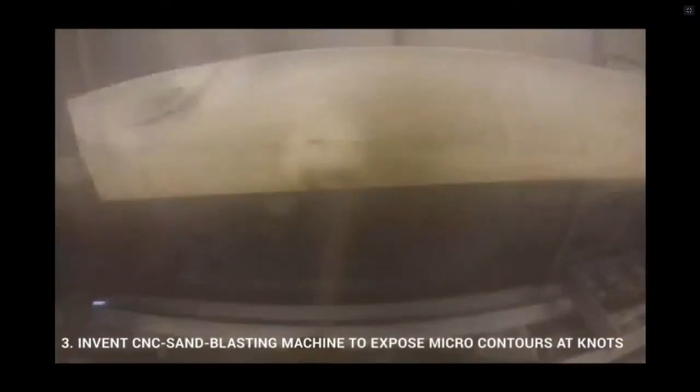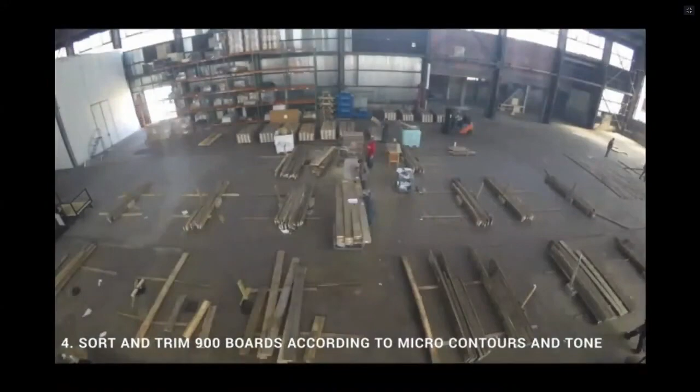So along these lines, I'd like to describe our design ecosystem at The Living, my design firm, which includes a variety of interconnected forces and involves a kind of hybrid of the familiar and the new, the ancient and the cutting edge, the technical and the social, the tangible and the atmospheric, the practical and the critical. So it's within this design ecosystem that I'd like to talk about a couple of examples of biodesign and our thinking about how biology can play into a broader design ecosystem.

So we think of our design ecosystem as a kind of network of interconnected loops. And within this network, the topic of our work often addresses climate change, and our approach, as Dan mentioned, often involves new possibilities at what we think of as the intersection of biology, computation, and design.

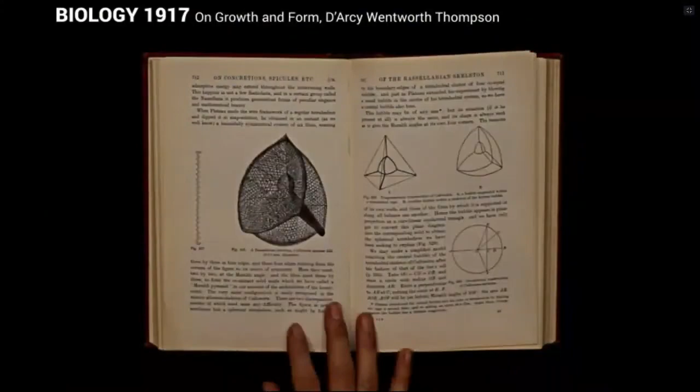Of course, as you know, you're the group that would know this best, architects and designers have been inspired by biology for hundreds of years. But I believe, as you probably also know and believe, that biology of today is different.

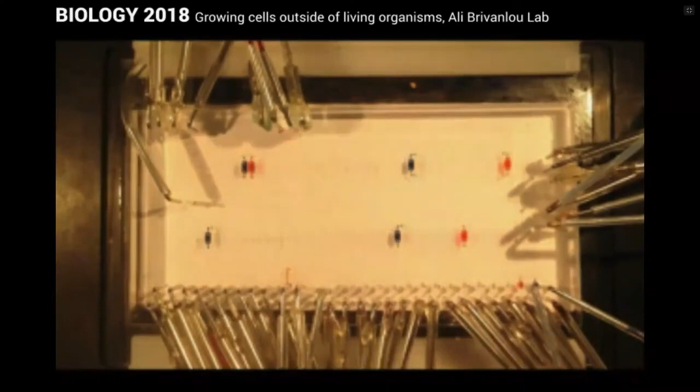It's now possible to grow a cell alone on a glass slide instead of inside a living organism. It's now possible to visualize neurons firing inside of an animal in real time. It's even possible to cut and paste DNA and bring creatures to life that never existed before, such as yeast that produces an anti-malaria medicine.

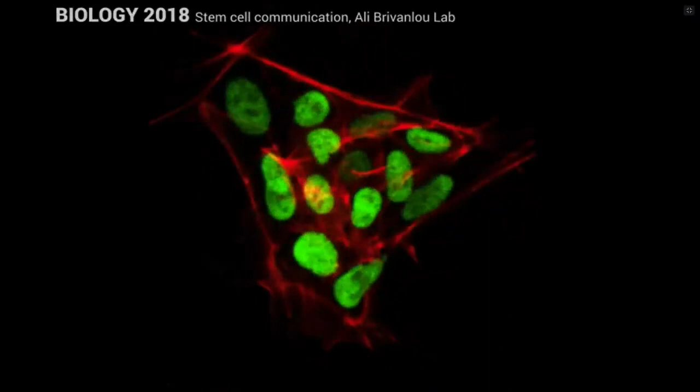And as of just a few years ago, with the demonstration of CRISPR and gene drives, it's now possible to redesign or even eliminate an entire species very quickly, essentially molding evolution itself.

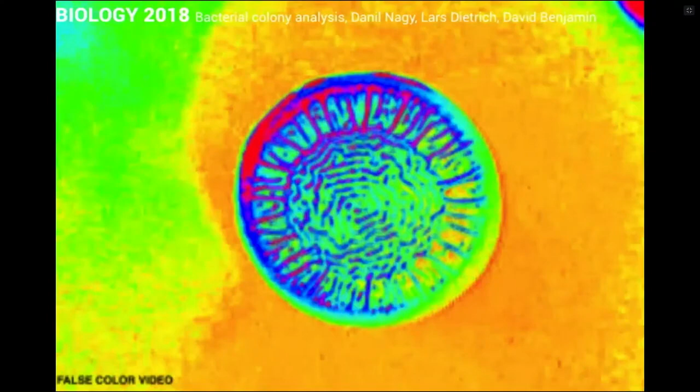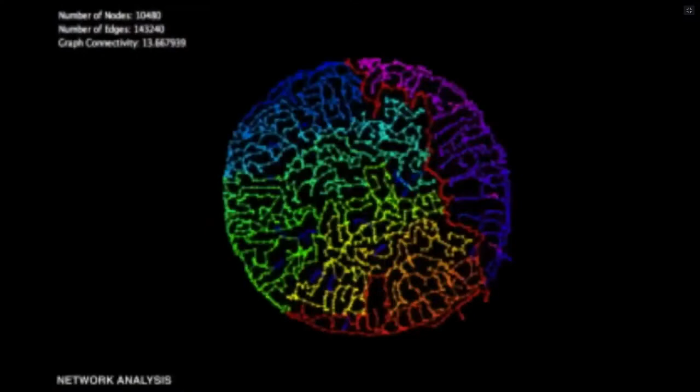In addition, it's now possible to apply some of the latest techniques of computation, such as computer vision and machine learning, to processes of biological growth. Biological functions involve hundreds of dimensions, but if they can be simulated in a computer model, then they can become a more actionable part of the design process.

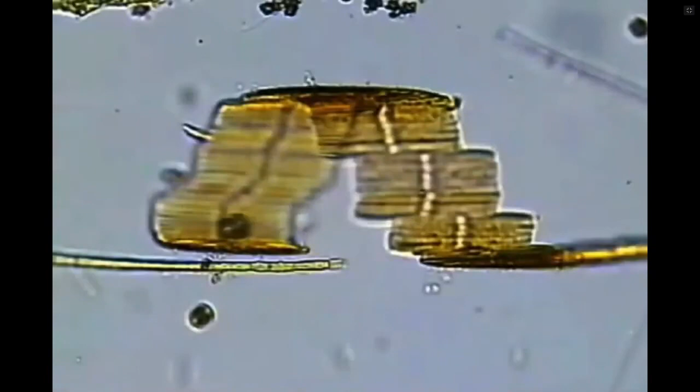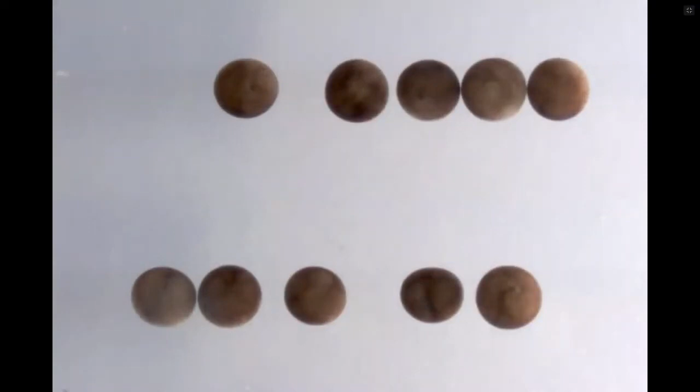Yet, the more you learn about biology, at least for me, the more you see how complex biology is and how much we still have to learn about it. And in this sense, I believe that design with biology may involve design with a black box, design with forces beyond our complete control, and design with uncertainty.

This new version of biology calls for a new method of design, a new approach. In the past few years, we've developed three specific ways of thinking about this, three specific approaches to biodesign, and three categories for projects. I'd like to describe them briefly here.

The first one is biocomputing, which I define as using actual living organisms to process information and solve problems such as perhaps reducing carbon emissions.

Although this component looks a little boring and forgettable—you've probably seen it several times on a plane and not thought much of it—it's actually very difficult to design with traditional engineering approaches, especially if you want a lightweight component. Airbus, in reimagining the future of flight, was thinking about how it could reduce the weight of airplanes, which would reduce fuel consumption and therefore carbon emissions.

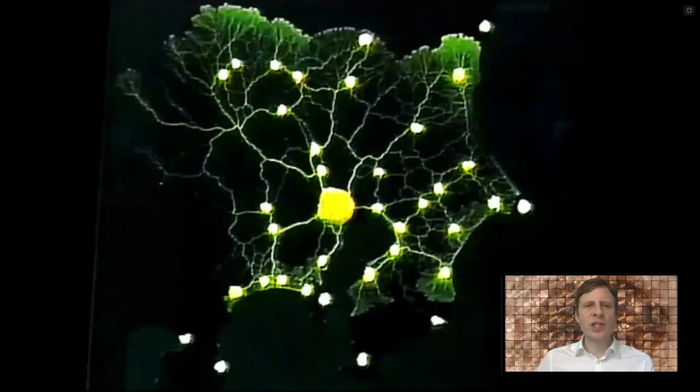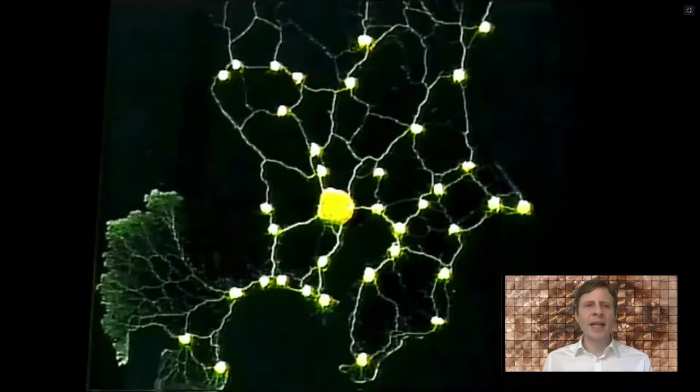This is where we turned to a living organism, in this case Physarum, also known as slime mold. Physarum grows in complex networks that are efficient and redundant. They're efficient in that they use a small amount of material to connect the dots—in this case, sources of food for the Physarum. And they're redundant in that the network can have one line removed or damaged, and the organism as a whole can still keep all the dots connected, more or less.

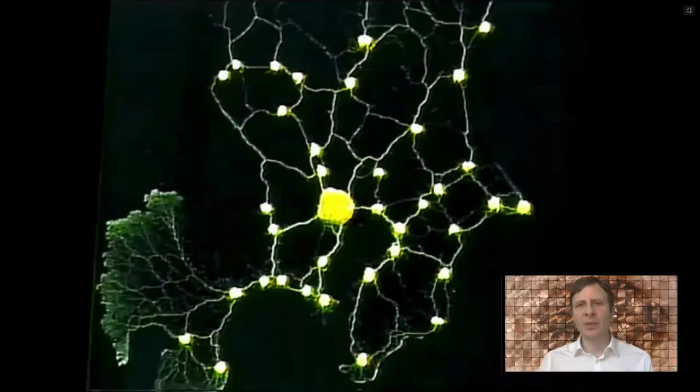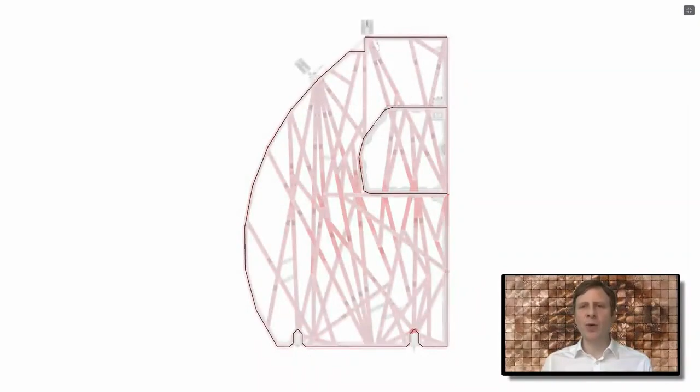So we used this logic, the logic of slime mold networks, to create an algorithm to generate potential partition designs, connecting the dots of what this partition has to do—connect to the points above and below, and hold some equipment. We used a process of artificial evolution to generate, evaluate, and evolve literally thousands of different design options, exploring a wide design space the way natural biological evolution itself does. But in this case, we're doing it in the computer.

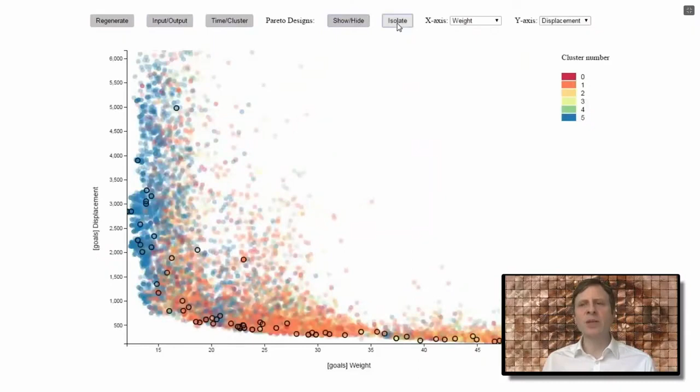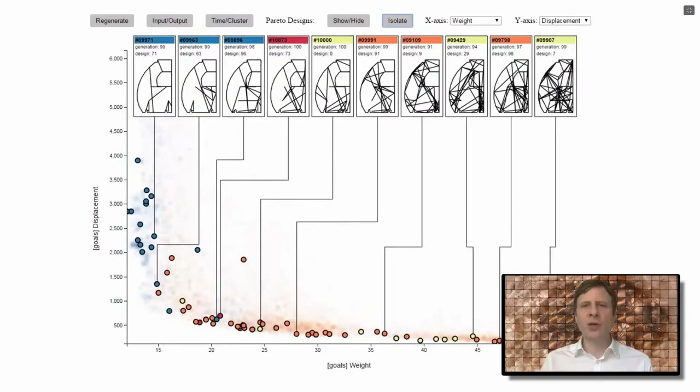So here's a different view of our data set. Each point on the graph is a different design option. We can sort the designs according to a kind of color coding, which might be the virtual DNA of the designs, different types of design solutions. We can use algorithms to identify the best set of designs, shown here in the black outline, and graph them according to our goals. In this case, we want the lowest possible weight, shown on the x-axis, and the lowest displacement under structural load, shown on the y-axis. We want to be at that zero-zero point of the graph. There are a number of different ways to do this, and a lot of them are slightly unusual, beyond a typical engineering approach.

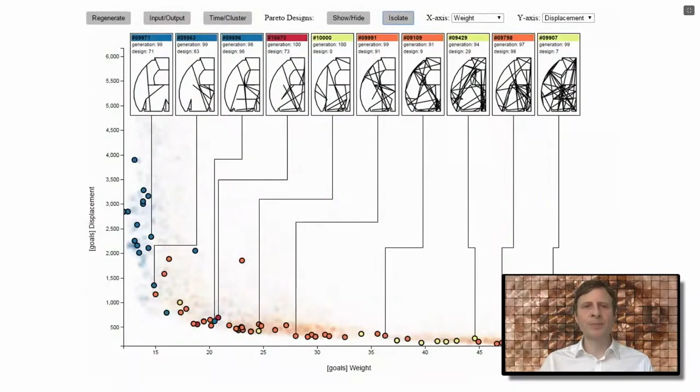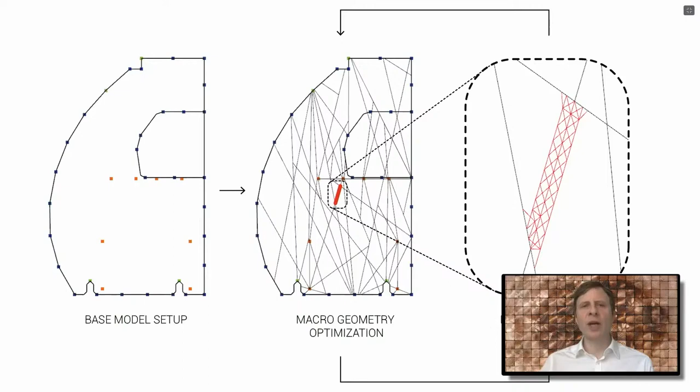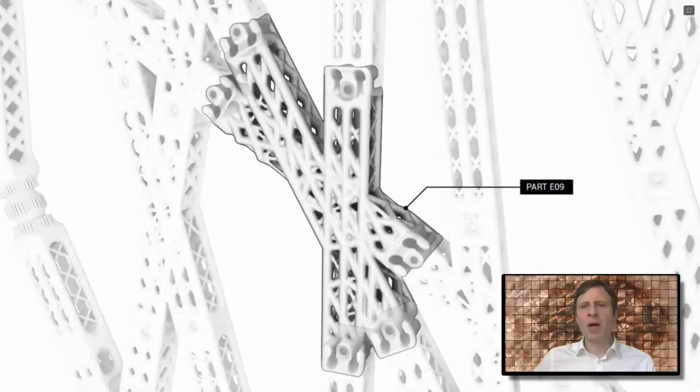Just like nature and biology itself, we can run this process at a different scale and rerun it. So here I'm showing how, on the left, we have the problem statement; in the center, we have a first round of artificial evolution, creating this crisscrossing pattern of bars. Then, in turn, we can create every single one of those bars out of hundreds of microlattice bars, shown on the right. To give you a different view, instead of using stock material as the bars, we're creating these bars out of microlattice, a smaller scale bar. Each bar is sized according to the amount of stress within it, somewhat like human bone.

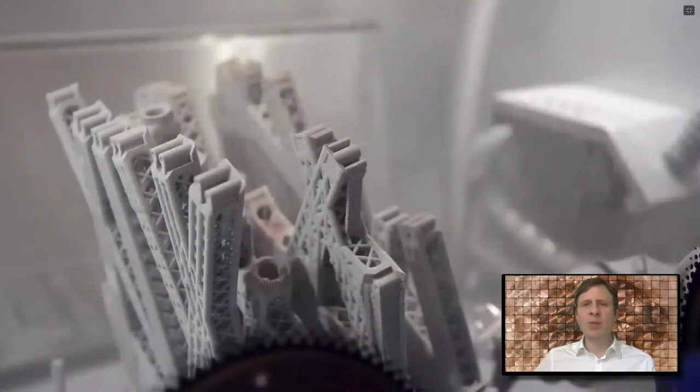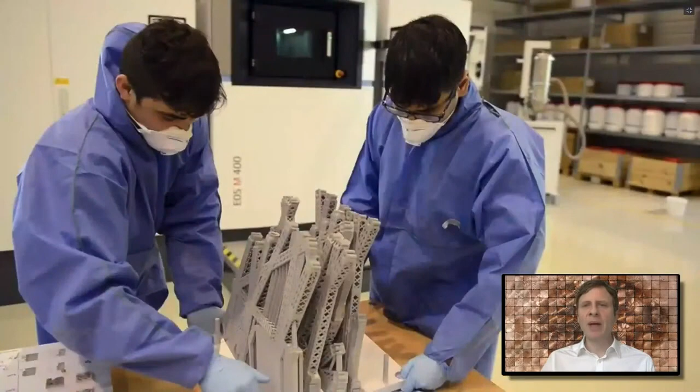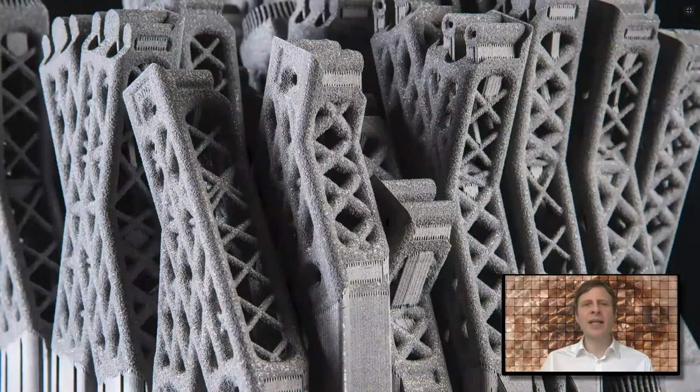And like many of our projects, we aim to test some limits of what was possible with the new design approach, but also to make it out in the world. So here you see the 3D printing process. We're making what is one of the world's largest metal 3D printed airplane components. We're doing this to see if this type of approach could create a new airplane component that could fly in today's planes. So here, zooming out, you see the first full-scale component created with this approach.

Here's a digital simulation of this component and how it's going to perform under something like the 16G test, or a static test where you're pulling on the component. And if that was the digital test in the simulation, here is the corresponding physical test.

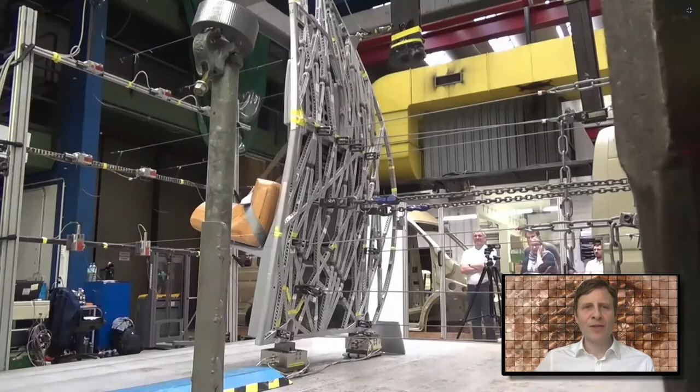This was just a few months ago, and if you look closely in the background, you can see some very excited but nervous Airbus engineers as we're testing the performance of this component, pulling on it with the weight of 16 times the force of gravity to see if this new approach, this new partition, can hold together. It did, and in the end, we have created a new airplane component that is about 45% lighter than the traditional component. It's even a little bit stronger.

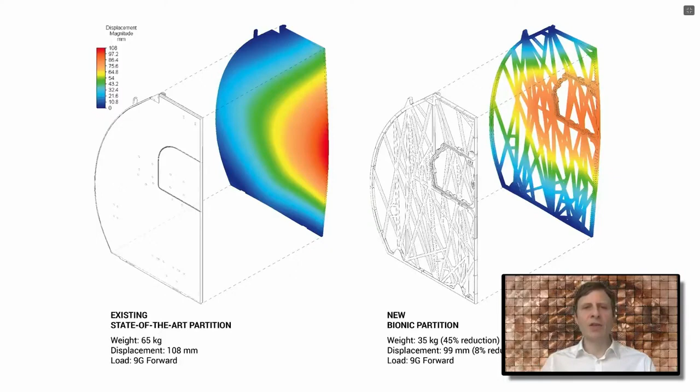So the second approach is called biosensing, which I define as using actual living organisms, not the metaphor of biology, but actual living organisms, to detect and make visible invisible conditions of the environment. In this example project, in collaboration with amazing artists and engineers, including Natalie Jeremijenko, we have been exploring a public interface to water quality in the East River of New York City.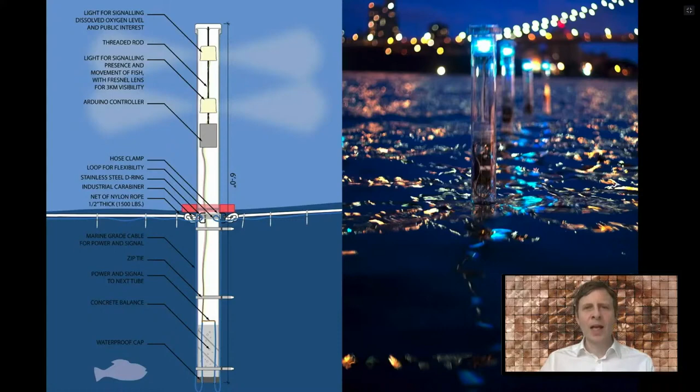We do this by creating a floating network of lights with sensors below water to detect things like presence of fish and water quality, and dynamic LED lights above water. Initially, we were using this kind of material - digital sensors, electronic circuits. But in a new version of the project, we've been using biological sensors, combining biosensors with digital sensors.

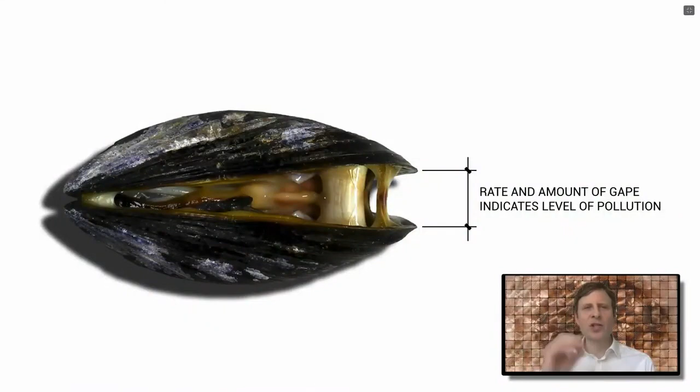And by this, I mean we're using actual living mussels, the shellfish. Here you can see a sped up video of the way that mussels open and close their shells a small amount as part of their natural metabolism. They do this to eat and to basically breathe dissolved oxygen underwater. And it turns out that the rate and the amount that mussels open and close their shells is an incredibly sensitive detector of water pollution.

So with that in mind, we can take some living mussels, attach to one side of the mussel shell an inexpensive magnet, and to the other side a Hall effect sensor, which basically senses a magnetic field. And for just a couple of dollars, we can have a better telltale sensor of water pollution and other stress in the water than, say, a $10,000 dissolved oxygen sensor.

So this is obviously good for a project budget, but probably more importantly and more profoundly, this suggests a new idea and a new approach, which is to combine artificial intelligence with natural intelligence - to combine artificial intelligence, the best that computation has to offer, the holy grail of AI, with a kind of natural or biological intelligence that has been there all along, that in many cases has evolved over millions of years to perform very complex functions, sensing functions, and other kinds of functions. And we can combine them together to get a kind of multiplier effect.

So here's one of the early prototypes of our installation. You can see the lights changing color because there's a tipping point in the water quality. The water quality is slightly improving at that point.

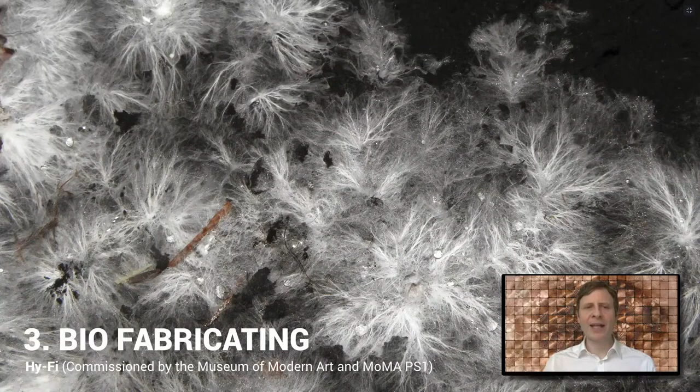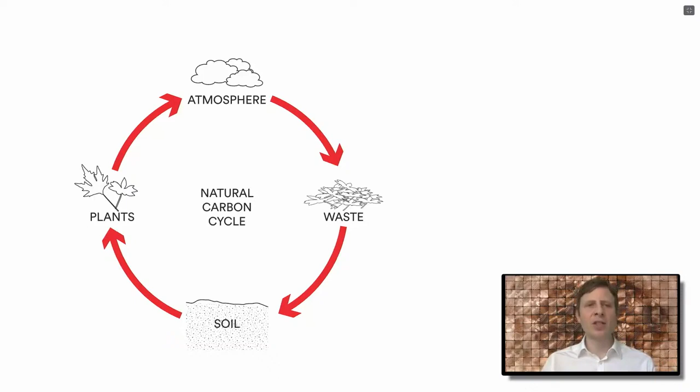So the third and final approach that I'll show to round out the three approaches is what I call biofabricating. This is using actual living organisms as tiny factories to manufacture renewable building materials. In this project, we started with a thought about the Earth's natural carbon cycle, the endless loop of growth and decay and regrowth.

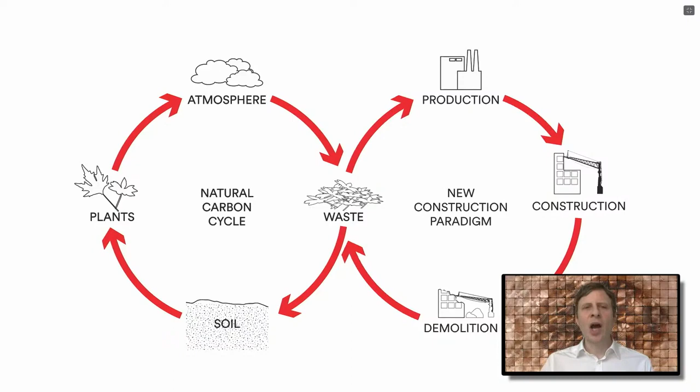We had the hypothesis that maybe we could take low value raw materials, waste instead of high value plants, spend a very small amount of energy to convert those raw materials into building blocks, create a useful building, and then at the end of its life, return all of that physical matter of architecture back into the carbon cycle.

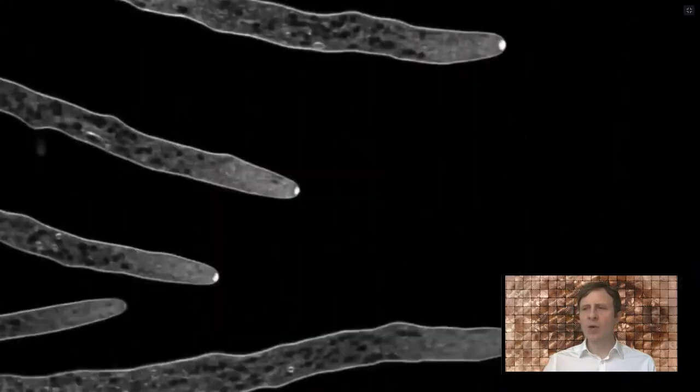How could we possibly do this? Seems like a bold idea. Well, we turn to a living organism, in this case mycelium, which you probably already know about. It's the root-like structure of mushrooms. It grows in branching patterns. You can see the nutrients coursing through these filaments of mycelium. It creates incredible patterns and forms, but we were actually more interested in the function of mycelium than the form.

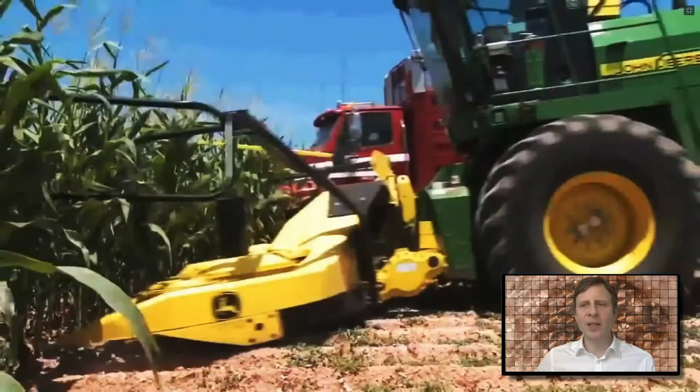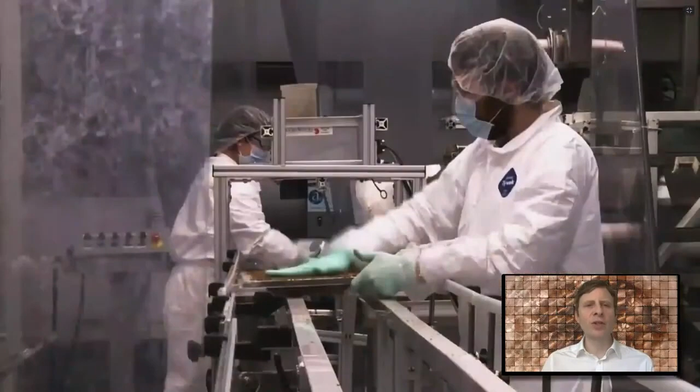It turns out you can combine mycelium with agricultural waste, not the high value part of agriculture such as corn kernels, but corn stover, the low value waste part. Combine that with mycelium, put it in a mold of almost any shape, and in just about 5 days it grows into a solid object.

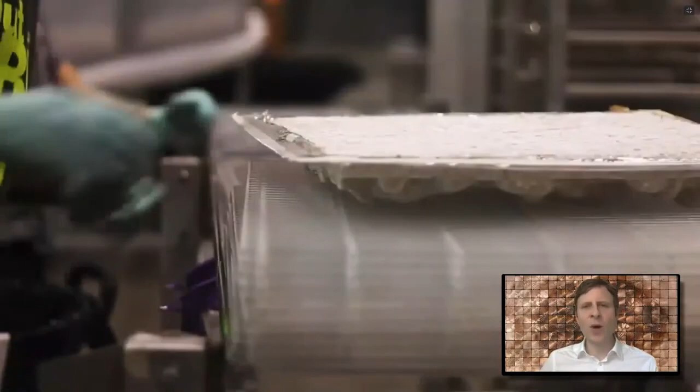This is a process being explored in a number of different ways, including by Ecovative, a company we worked with on this project. Ecovative makes packaging material out of mycelium. Our idea a couple of years ago was to create an architectural brick out of this material.

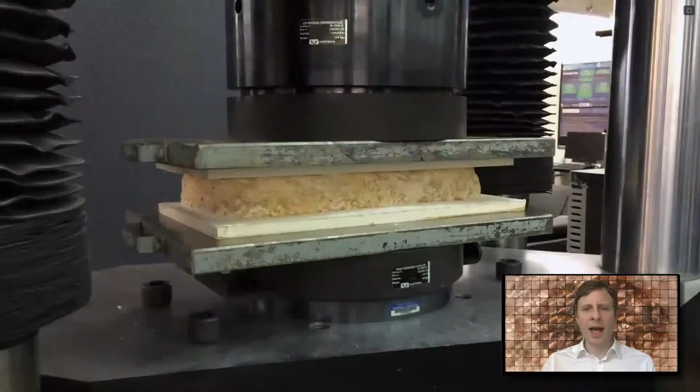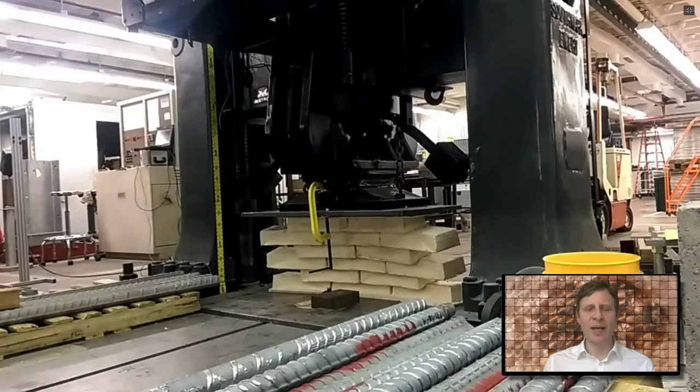Because no one had created large-scale outdoor architecture out of this material, we had to do a huge amount of testing. We tested single bricks, compressing a brick to the force of 10,000 pounds, more than it would ever have to resist, and compressing small assemblies of bricks. We did this so that in the end we could try to create a full-scale structure out of the material as a test of its viability.

So here we are in the courtyard of MoMA PS1, creating a structure that lasted for the summer, as these projects do in the competition for the summer Young Architects program at PS1.

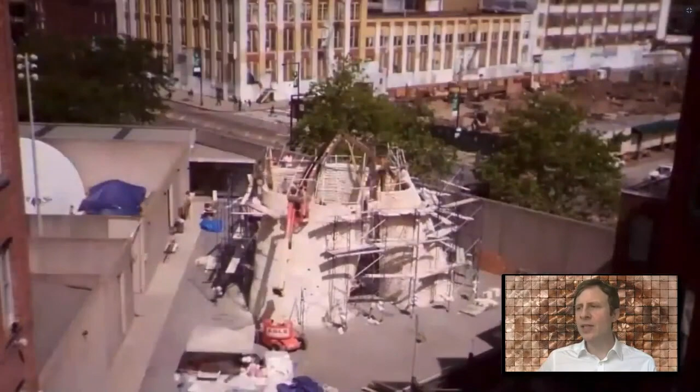Here you can see us combining into our design ecosystem not only some technical performance and biomaterials and biofabrication, but the expertise of a number of different people and categories of people.

We combined the expertise of Columbia University graduate students in architecture who know a lot about form and computation, and the expertise of New York City brick masons who know a lot about stacking objects. Neither one alone had ever made something like this before, but together they solved some problems on site to create this experimental structure.

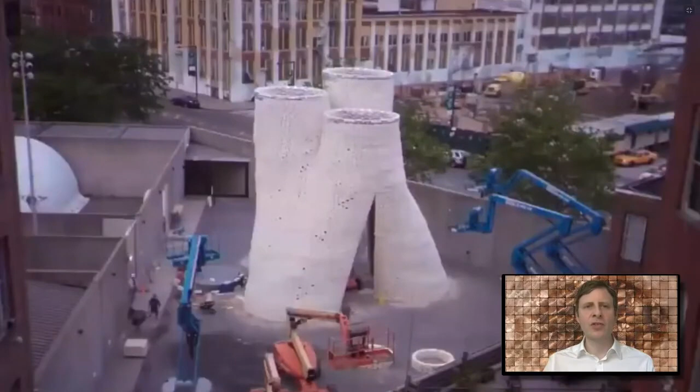Here you can see the structure in the context of the rest of New York City. In the background, you have some of the glass and steel skyscrapers of Manhattan. In the foreground, you can see the red clay bricks of MoMA PS1. Our structure was kind of familiar, but also new, framing the environment.

We were experimenting with not only the technical performance of this material, could it be strong enough, could it be weather resistant enough, but also the creative capacity of the material, the atmospheric potential of the material. What would be the qualities of light and shadow on this material? What would it feel like to be inside it? What would it smell like?

But of course, the ultimate test of any MoMA PS1 summer installation is its ability to host a good party. So here is the first Saturday of that summer when we installed it, and you can see 5,000 people arriving to hear experimental electronic music.

It was a thrilling moment for us to unveil this prototype, but also terrifying as people were walking inside our structure, rubbing it, scratching it, climbing it. And when darkness fell, we breathed a sigh of relief.

But it was actually very fitting for us to test this idea, this new biofabrication process, this new material out in society, out in culture, more or less in a kind of public space rather than only on a lab bench indoors or on the fenced off corner of a construction site.

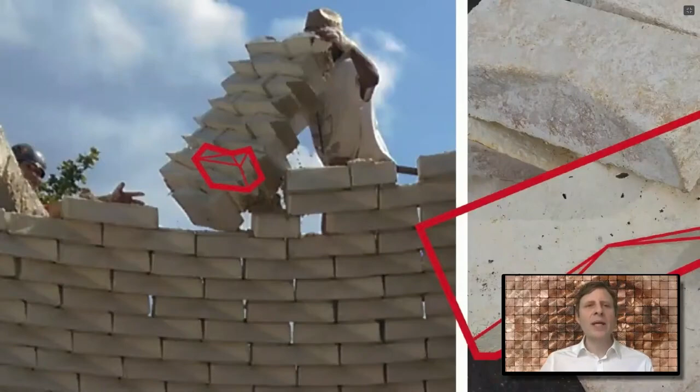The project also engaged a type of dialogue and public reaction through this new kind of short form criticism and discussion. At the end of the summer, we took the structure apart a little more carefully than you might typically do. We took all of the bricks and crumbled them into smaller pieces.

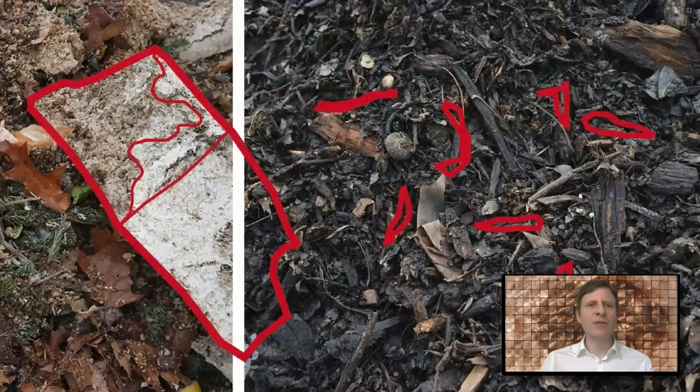We combined them with yet other living organisms, bacteria and worms, in a compost site. In just about 60 days, all of the physical stuff of that piece of architecture, all of the matter returned to compost, which we in turn used for New York City tree planting and even for community gardens, more or less proving that this is a material that's non-toxic enough to eat.

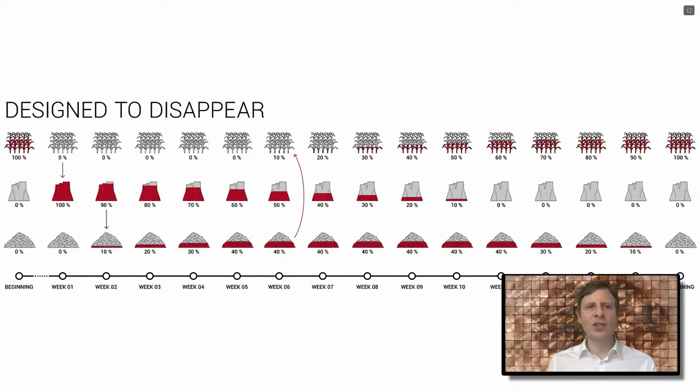One of the bigger ideas of the project is that maybe as designers and architects, we can think about designing to disappear as much as we normally think about designing to appear.

So if I've tried to paint a picture of 3 different approaches we've been exploring and shown some example projects of the kind of hands-on prototypes we make in each approach, it's important to note that these projects are very open-ended. They're not ends in themselves. In a way, they're never finished.

Instead, each project potentially generates new questions and new possibilities. And with some of these questions and possibilities, they can grow into new projects. I want to show one example of that now.

I'll explain how with our project Hy-Fi, which I just showed, the installation for PS1, our bricks were alive during their formation, but then they became dead, inert, and predictable when we dried them out, and they became more or less like other building materials during construction and occupation.

But we always had this question: what if the bricks were not dried out, and if the material did not become dead and inert? What if building materials could be literally alive? Would they have some of the same properties of living organisms, like self-healing and self-attaching and growing?

This is an idea and some questions that we wanted to experiment with, and we found the opportunity in a new installation a few months ago at the Pompidou Center in Paris.

So we started experimenting with growing new units of material and placing them next to each other when they were still growing and alive. This was our hypothesis, and we quickly saw that we were able to achieve what we call bio-welding. Basically, the living units fuse together, they grow together, and we have, in essence, brick and mortar in the same object.

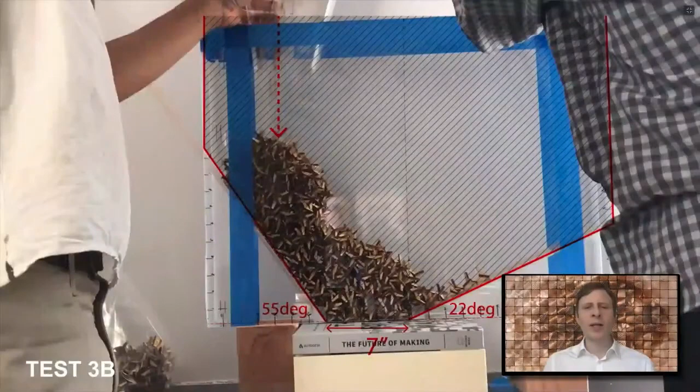Then you can combine jamming with a formwork, and this is something that's been studied in different applications, including funnels. So in something like a grain silo where you have a funnel, there's a lot of research on how to avoid jamming.

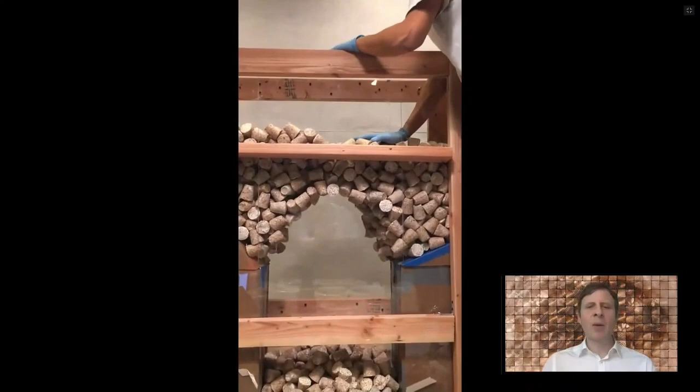You don't want the objects to kind of clog together and create a sticking point. But we were interested almost in reversing the idea. What if you deliberately created something like a clog in something like a silo or a different shape of a formwork? Could we create a more or less poured version of architecture through jamming and then biowelding?

So you see some tests at different scales in those prototypes in that video. We used those tests to develop a kind of rough idea of a design we were interested in. We couldn't ensure exactly what it was going to look like, but we set up the process and the rules to try to create a new, more or less architecture scale prototype inside the Pompidou Center in Paris.

So this will just show a few of the quick steps. Here we're again growing mycelium blocks. We're using simple buckets as the formwork. And we're going to grow them in two separate phases.

The first phase allows the units to kind of solidify into their shape, so it goes from a loose material of mycelium and agricultural waste into a kind of solid object. But then there's a second phase of growing when the objects are next to each other.

Meanwhile, we take those objects and rather than stacking them one by one like typical brick stacking, we pour them into a kind of formwork with very specific dimensions and properties. Here you can see us building the formwork. It's more or less scaling up from what was shown in the previous clip of the prototypes.

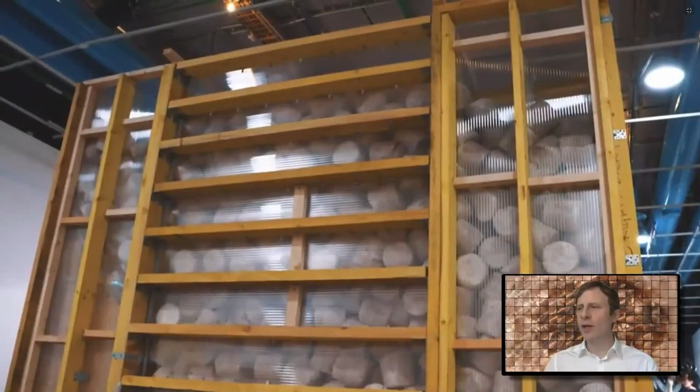Here you see the units inside of the formwork. And then we critically remove more or less the plug at the bottom of the funnel. So if you think of that box as a kind of funnel, we remove the bottom.

Luckily, there's some jamming, which means the objects aren't just pouring and flowing out of the bottom of the plug. We remove the looser objects, but there is a kind of self-organized form of an arch of the objects that are jammed in more together. This follows the line of force.

And then we allow the objects to grow together. So the first process is jamming - that creates a kind of void at the bottom and an arch shape. The second process is biowelding over 5 days. And here you can see then when we remove the entire formwork, we have a somewhat self-organized construction of a physical arch made from jamming and biowelding.

Okay, so finally, I want to wrap up and just say if those first three approaches sometimes generate a kind of spin-off project, sometimes just thinking about this domain of biodesign or really any domain in a design ecosystem can lead to kind of new veins of research. And I want to show the last project as a new vein of research that we've explored recently.

So this is a project that's still in progress. It involves some ideas about ecosystems, architecture, and public health. It's a collaboration with two good friends and colleagues of mine, Kevin Slavin and Elizabeth Hénaff. And it builds off some amazing work that they and others have done at the intersection of biology and cities.

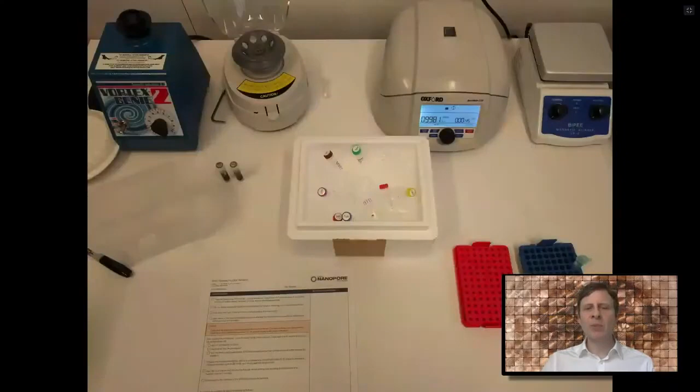First, swab sandblasted tiles from each location to collect the surface microbes. Then place the swab in a liquid solution and agitate it to break down the cell walls. Then separate the DNA from other substances. Add marker beads to the DNA fragments and produce a pure DNA solution.

Load the DNA solution onto a flow cell to be processed by a portable DNA sequencer. This can basically just be plugged right into a laptop through the USB port. And the sequencer converts electrical charge from the flow cell into sequence data - the A, T, C, and G of genetic code.

So finally, after we sequence the DNA from each location - the gallery in Soho and some other locations around the city - we designed a system to automatically draw the output as an early and very rough map to an uncharted territory: what's going on in the invisible microbial world in our urban environment. This map is raw and at a coarse resolution, but it's already allowed us to see interesting things. For example, in the Brooklyn Navy Yard, we saw microbial DNA that performs the function of breaking down heavy metals, which indicated that the Navy Yard had specific pollutants not found in Soho.

So basically what this project has done is allowed us to use a gallery as an urban space that we're converting into an active living experiment - architecture as a living experiment. We're exploring a new type of architectural facade as a new way of seeing some of the important matter and organisms that help keep us alive. We're looking at materials and their layers of living matter, such as invisible microbes. We're reframing buildings as stewards for the urban microbiome. And the initial evidence indicates that our collective future - the future of all humans plus all non-human animals and all microbes - is probably a lot more collective than any of us can see or imagine.